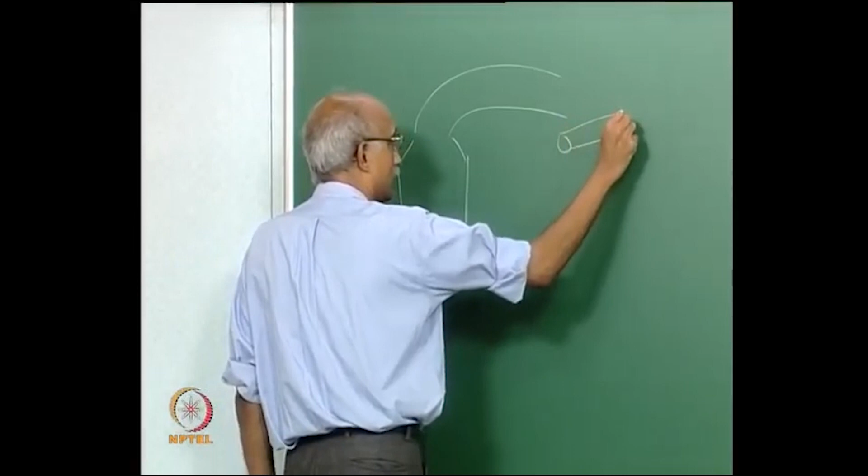The particular illustrative example we were looking at in the last lecture, which we will now go back to, is the case of pulverized coal combustion in power plants. In particular we were looking at the heat transfer associated with the flow of the hot gas which encounters a tube that is held transverse to the flow of the combustion gases.

Again the point here is omega p and dp, that is particle mass fraction and particle size, can vary quite a bit in terms of how they are present in the gases. The primary particle that's present, if you are burning coal, is primarily ash particles, which is the incombustible inorganic fraction of the coal matrix.

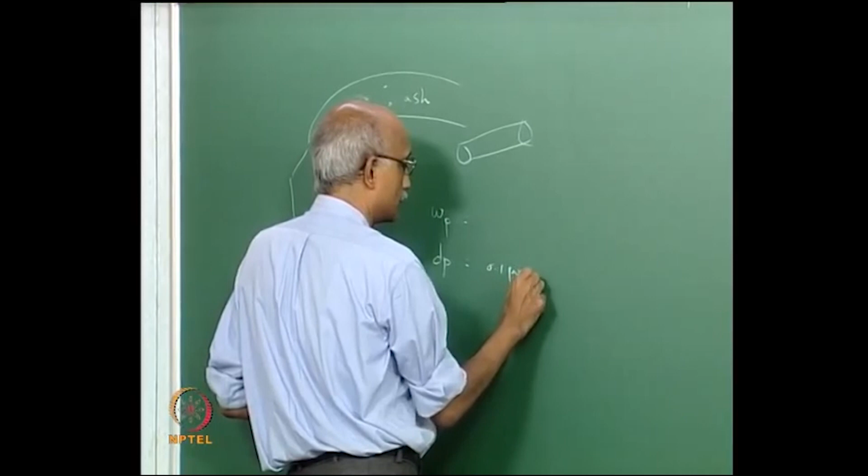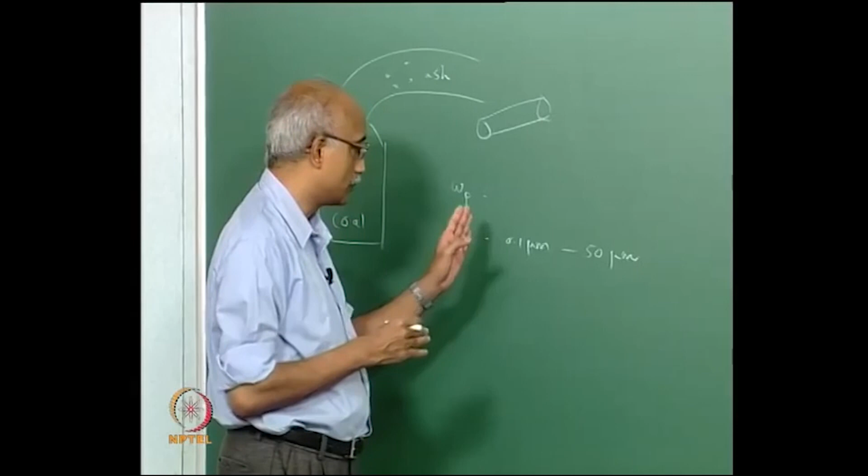And if you look at the typical size distribution of ash particles, it can range anywhere from submicron to 50 microns. So clearly this is a very broad distribution within which on one end of the spectrum diffusional effects and phoretic effects are going to be important, and on the other end of the spectrum inertial effects are going to be equally important.

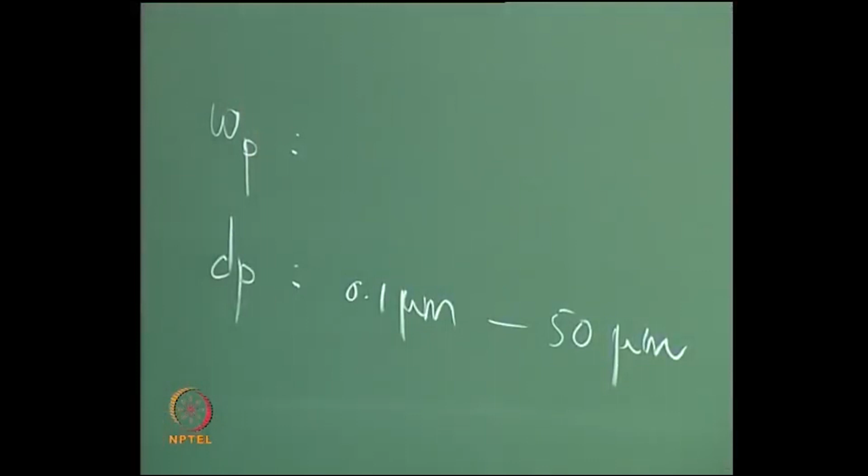The mass fractions are likely to scale inversely with size. For example, the 0.1 micron sized particles are likely to be present in much larger quantities compared to the 50 micron size particles. So, in terms of the mass fraction, this may be of the order of 10 to the power minus 4, and this may be of the order of 10 to the power minus 6, just roughly.

The relative effects of particles in different size ranges very much depends on the inventory of particles that are available in those size ranges, which is a function of particle size. Now, the other parameter that is also important is the diffusivity of the particle, which scales inversely with size. So, fine particles are going to have much greater Brownian diffusivities compared to larger particles.

So, if you look at the Schmidt number, which is equal to nu by dp, nu is of course the kinematic viscosity, which is equal to dynamic viscosity divided by rho. So, if you look at the ratio of nu over dp, what is going to happen? Schmidt number for fine particles is going to be much smaller because diffusivity is in the denominator.

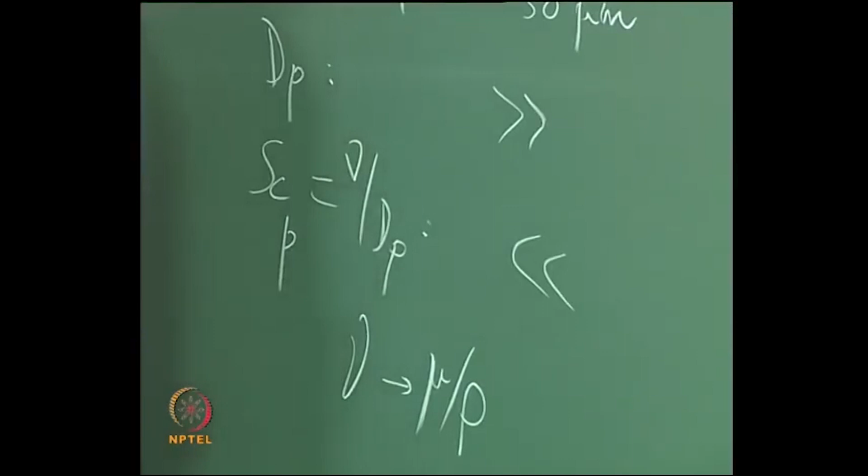The kinematic viscosity is a gas characteristic, so that remains constant. However, fine particles have much larger diffusivities, and therefore the Schmidt numbers are significantly smaller for the submicron fraction. In fact, the Schmidt number can vary all the way from 10 to the power 4 to 10 to the power 8 for various particle sizes encountered in a typical combustion process stream.

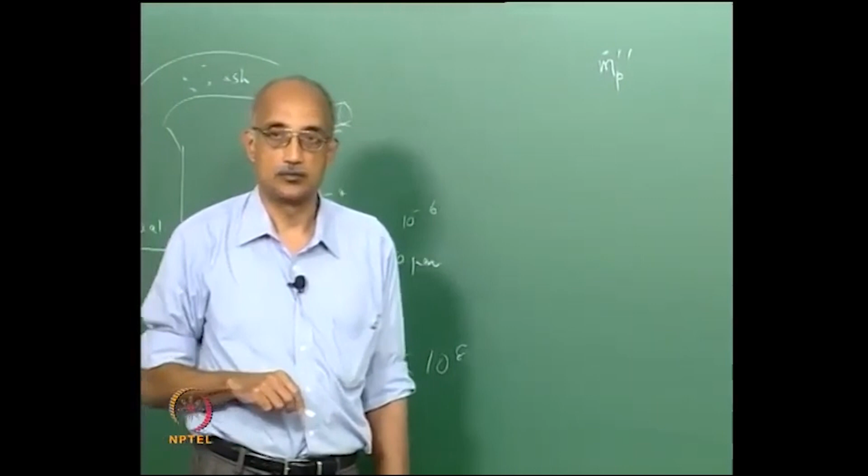So what this means is that if you now estimate the rate at which particles are depositing, and assume that you have a tube of length L and diameter dw, you can take mp dot double prime, which is the particle flux depositing on the wall, as equal to either a Nusselt number of the particles multiplied by the reference particle flux under diffusion control conditions, which is equal to rho times dp times omega p infinity minus omega p w divided by a characteristic length. Or you can write this as Stanton number multiplied by rho times u times omega p infinity minus omega p w.

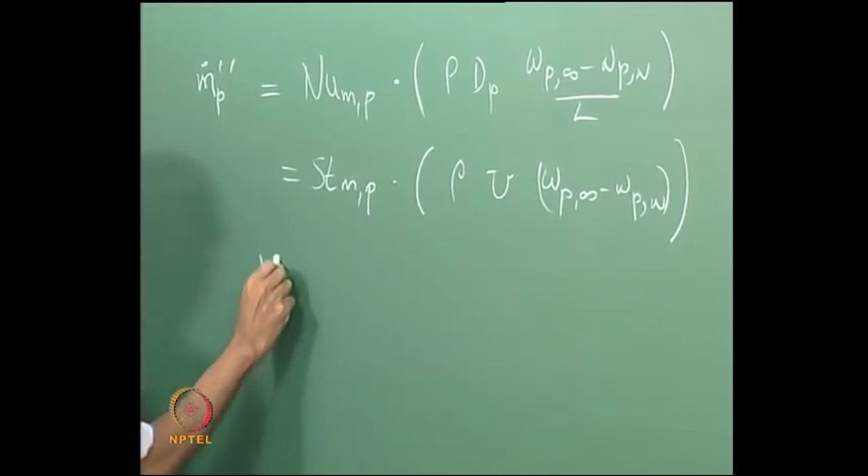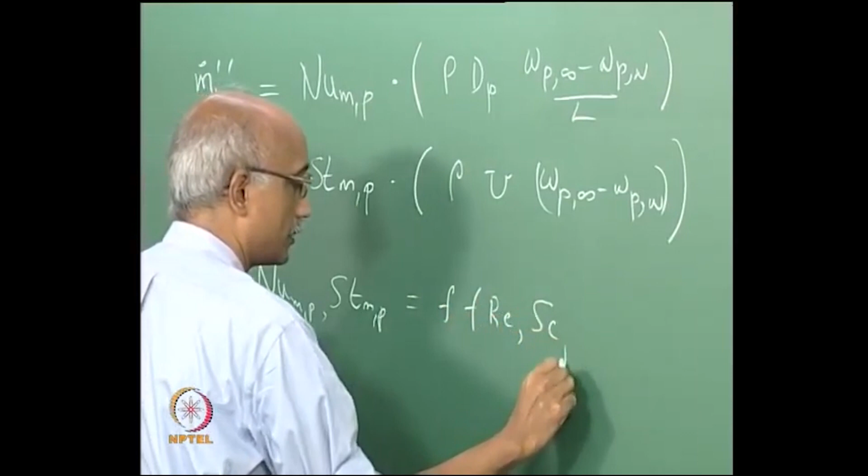So the quantity within the parenthesis is the corresponding reference flux in the diffusion control condition and in the convection control condition. As we have seen before, the Nusselt number as well as the Stanton number are functions of Reynolds number and Schmidt number, just as the heat transfer Nusselt number and heat transfer Stanton number are functions of Reynolds number and Prandtl number. In fact, as I mentioned in the last class, this f and this f are identical.

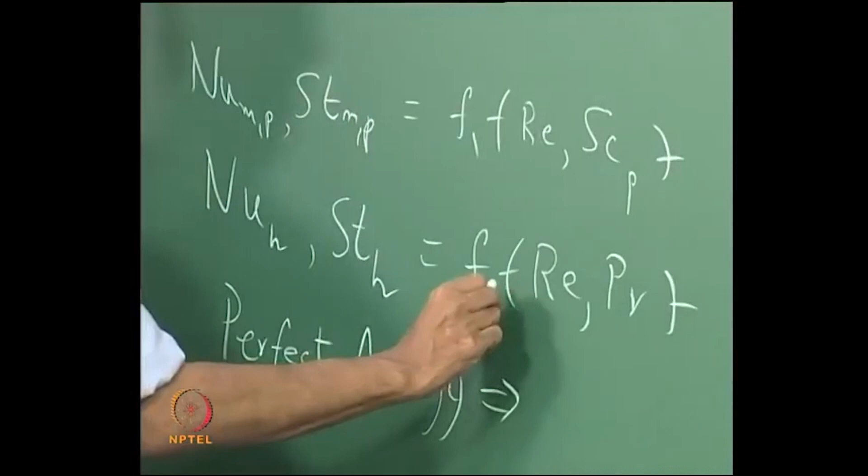So if this is F1 and this is F2, under conditions where there is heat to mass transfer analogy, F1 can be taken to be equal to F2.

So practically what does this mean? We can always estimate these values because it is experimentally easy to measure. We can measure the Reynolds number. Prandtl number for a hot gas is roughly 0.7 or so. So you can establish what the Nusselt number for heat transfer is, and for a typical combustion gas reaching a temperature of 1000 Kelvin at 1 atmosphere, the Nusselt number for heat transfer corresponding to a circular cylinder in cross flow is roughly 36.

What does that mean for the Nusselt number for mass transfer then? Is it going to be higher or smaller? Remember that the way you estimate the Nusselt number for mass transfer, if you know the Nusselt number for heat transfer, is to multiply it by the Schmidt number and divide by the Prandtl number, and the function should be the same.

So let us say that the Nusselt number for heat transfer goes as Prandtl number to the power 1/3, which again is true for most hot combustion products. Then the Nusselt number for mass transfer will be the Nusselt number for heat transfer times the Schmidt number for the particle divided by the Prandtl number to the power 1/3. But as we have seen earlier, because diffusivities have small values, the Schmidt numbers are actually quite large. So the Nusselt number for mass transfer is going to be roughly 10 to the power 3 to 10 to the power 4 times the Nusselt number for heat transfer.

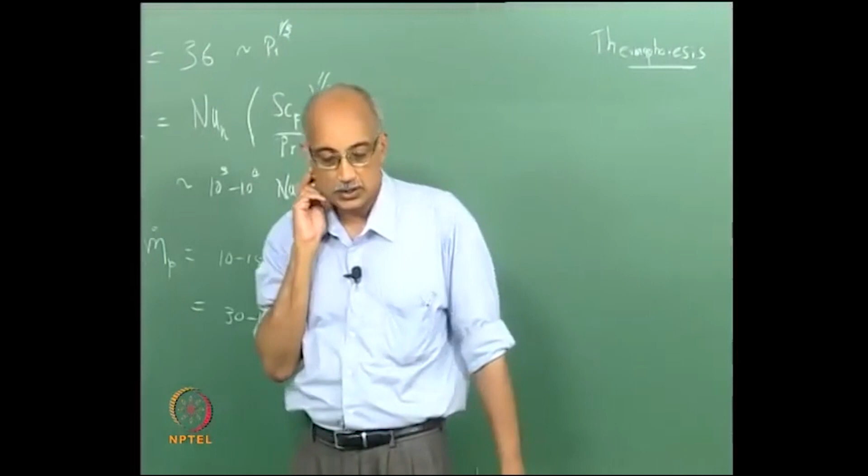As mentioned in the earlier lecture, thermophoresis is the velocity induced on a particle due to the presence of a temperature gradient. A temperature gradient does not only drive heat transfer, it also drives mass transfer, because particles at two different temperatures have different energy levels, and under equilibrium conditions they want to equilibrate their energy, so hot particles tend to move towards cold regions. There is always an equal and opposing flow induced, called Stefan flow, but we will not get into that in this course. The diffusion, or more accurately the convective motion of particles down a temperature gradient, is known as thermophoresis.

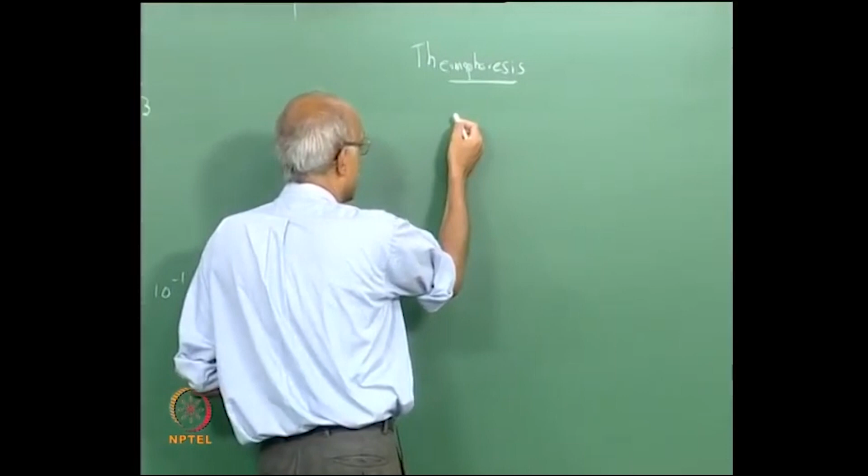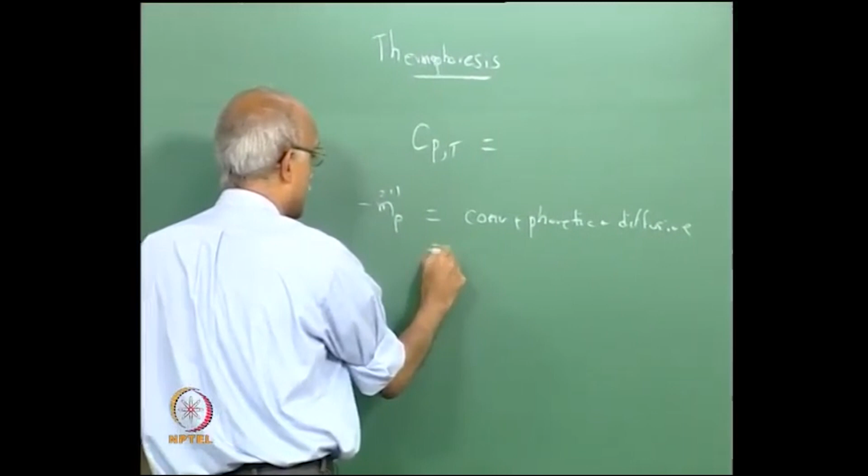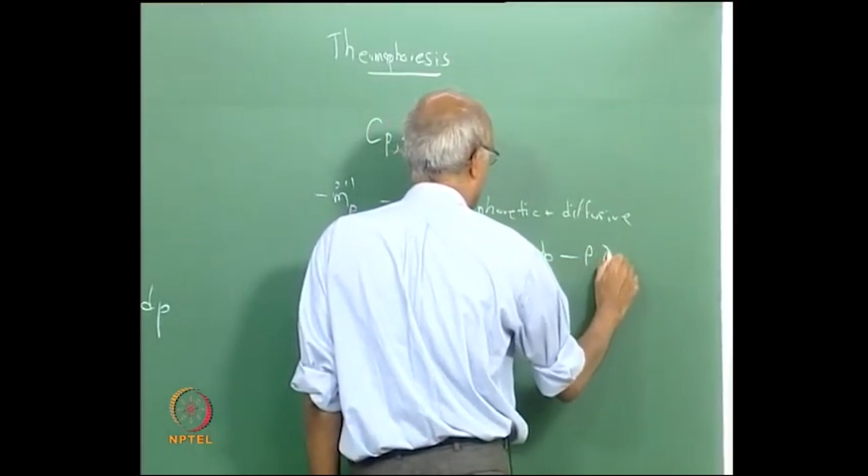The velocity Cpt associated with thermophoresis - recall that the overall flux of particles has three components: minus mp dot double prime equals a convective part plus a phoretic part plus a diffusive part. We had written this as rho times u times omega p, plus rho times Cp times omega p, minus rho times dp times gradient in omega p, in the last class.

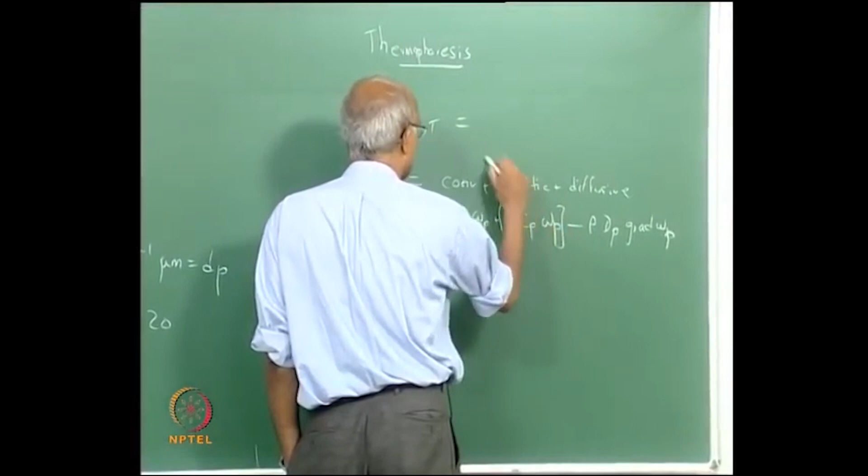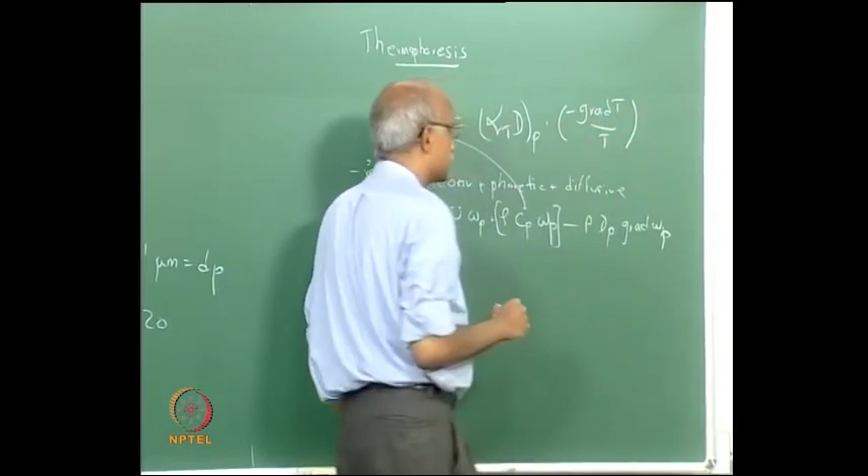So this Cp thermophoresis is essentially the phoretic component, and it can be written as alpha T d for a particle multiplied by minus gradient in temperature divided by temperature, which can also be written as minus gradient in logarithm of the temperature. This parameter, alpha T d p, is called thermophoretic diffusivity.

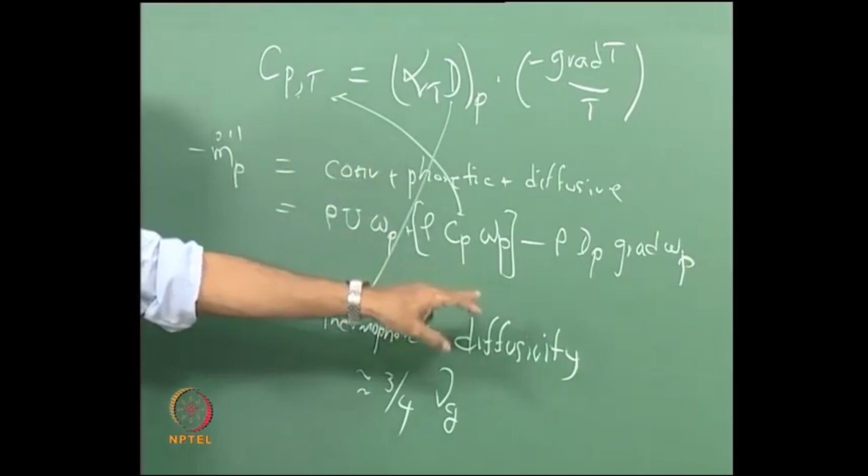Interestingly, no matter what the particle size, this parameter alpha T d p is approximately equal to 3/4 of the kinematic viscosity of the gas. This relationship prevails virtually in every practical environment that has been sampled. So it basically says that if you know the temperature distribution present in your system, and you know the viscosity and density of the fluid in which the particles are suspended, then you can estimate the thermophoretic velocity - the convective velocity induced on the particle by the presence of a temperature gradient.

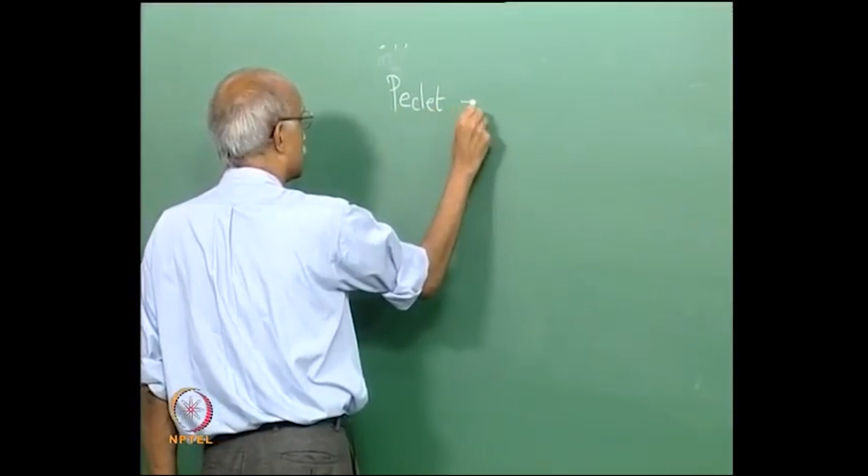So let us say that you have estimated Cpt, what do you do with that? The next thing you do is estimate a Peclet number. The Peclet number in this case is written as minus Cpt times dW over Dp, times the Nusselt number for mass transfer under 0 conditions. Remember, we discussed the 0 condition yesterday - this is the Nusselt number you have just estimated here, NUMP 0.

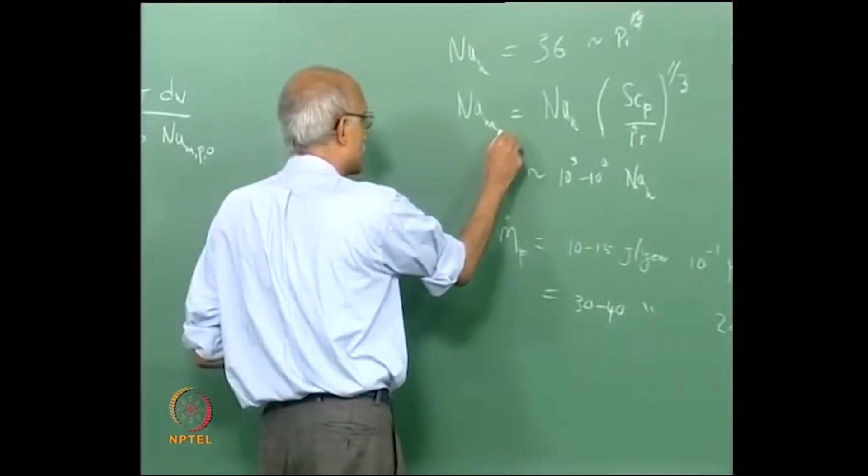Again, remember what we discussed in the last class, that the 0 condition here implies that we have been assuming perfect analogy between heat and mass transfer. So this is your baseline Nusselt number that would have prevailed if there were no analogy breaking conditions. That is now included in this Peclet number in the denominator.

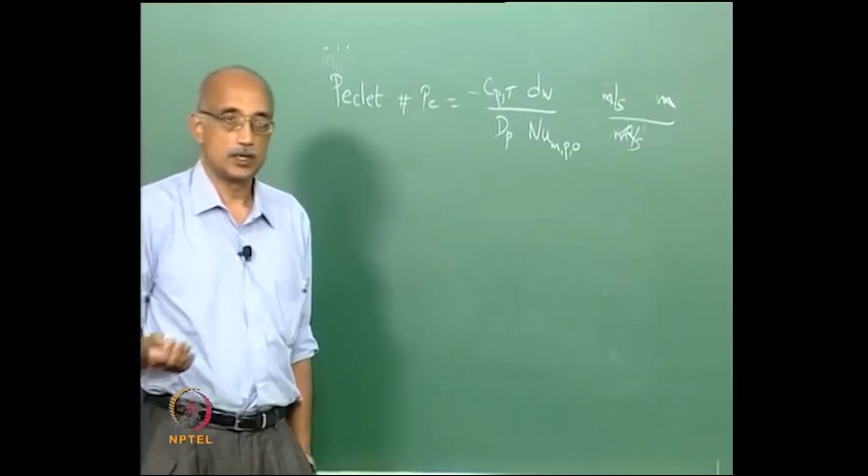Just check the dimensionality: Cpt is velocity, times dW is meters, divided by meters squared per second. So this is a non-dimensional parameter which is referred to as the Peclet number. This is the formulation of the Peclet number for a diffusion dominated case.

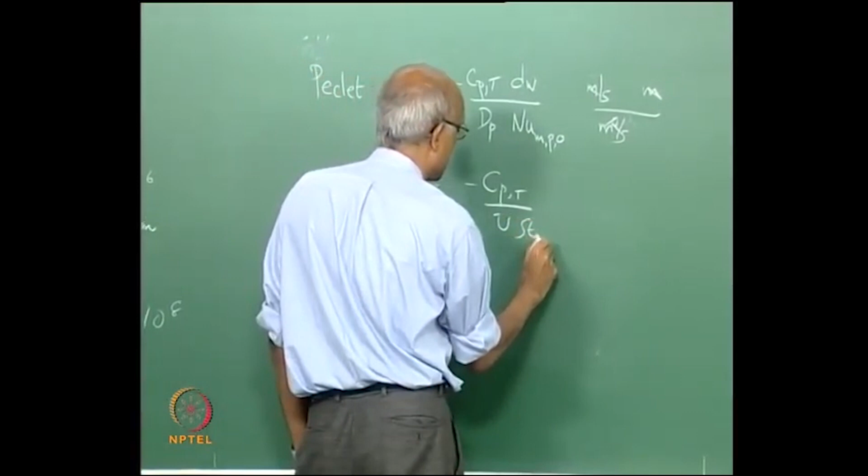In the case where it is convection dominated, you write it as minus Cpt over the prevailing convective velocity u, multiplied by the Stanton number for mass transfer, again evaluated under perfect analogy conditions, assuming that thermophoresis and inertia are not playing a crucial role. So you estimate the Peclet numbers because you know everything else.

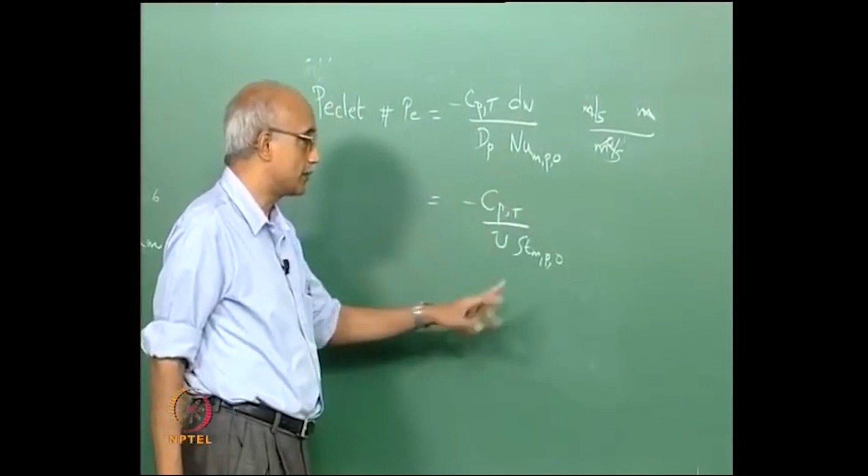You know the thermophoretic velocity from that expression, you know the diameter of your tube, you know the diffusivity of the particle, and you know the velocity of the gas stream, and you know either the Nusselt number or the Stanton number under perfect analogy conditions, because you can estimate them if you know their heat transfer counterparts. So the Peclet number can be estimated.

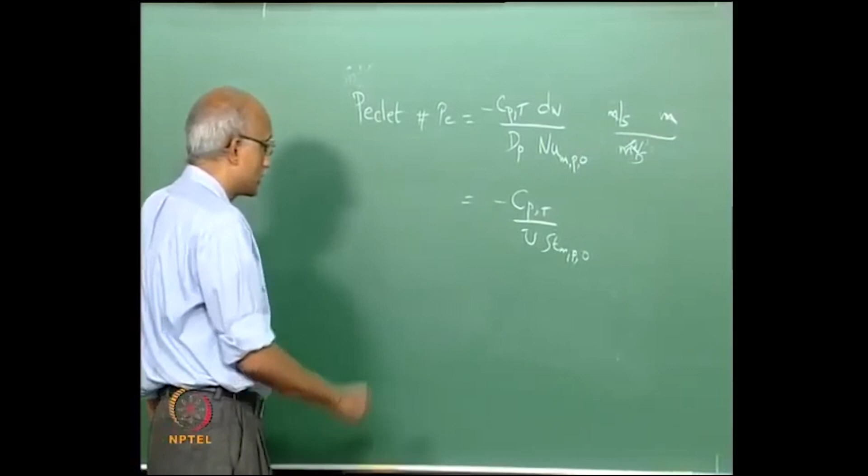Then you develop something called a correction factor, which is based upon the Peclet number. It is equal to the Peclet number divided by 1 minus exponential of minus Peclet number, and then finally you apply this correction factor to the baseline values that you had previously estimated.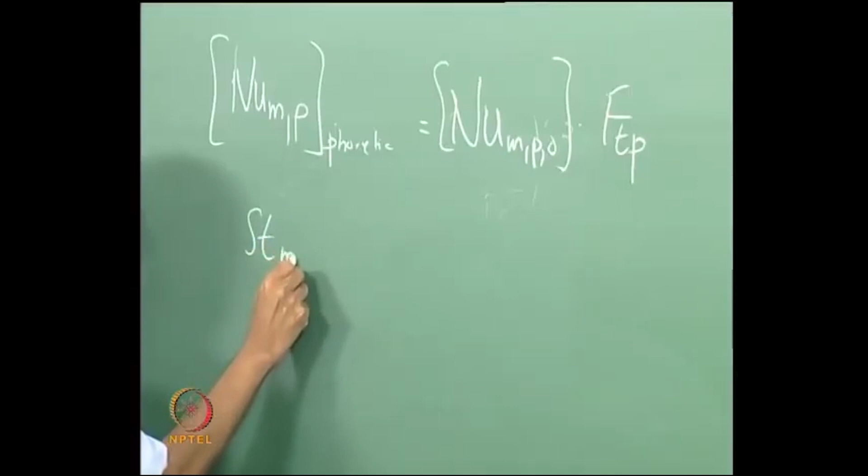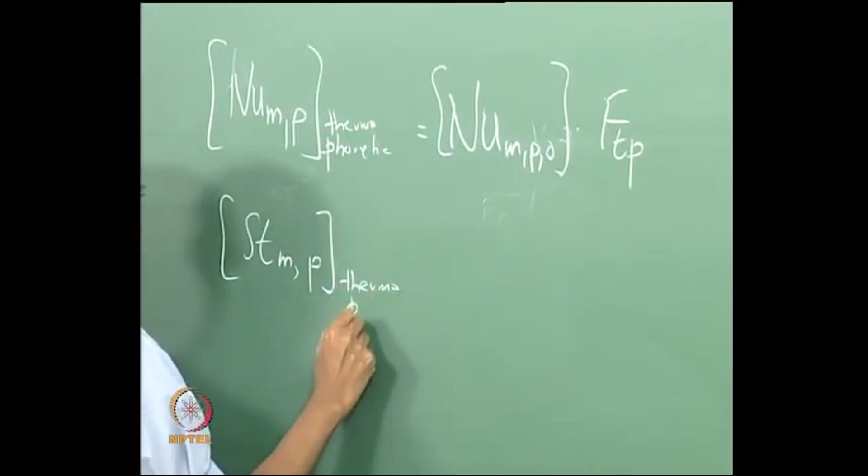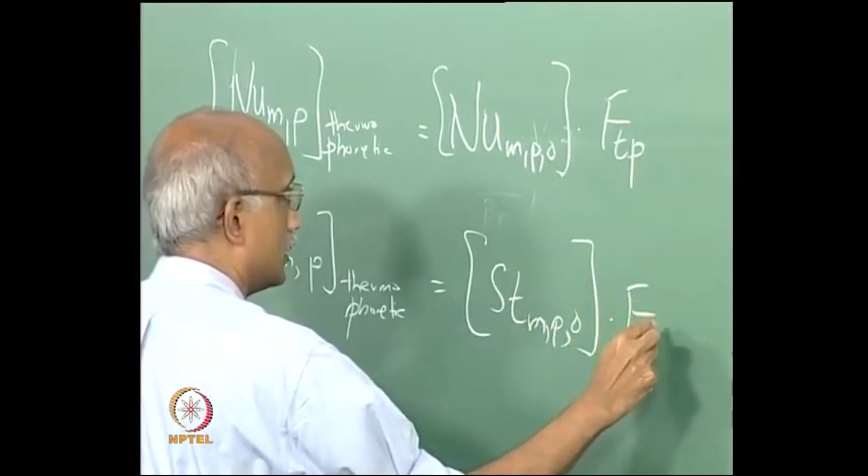So NUMP under phoretic conditions is equal to the NUMP 0 that you had previously evaluated, times this F - let us call this the F correction factor for thermophoresis, FTP. Similarly, the Stanton number for mass transfer for a particle under thermophoretic conditions will be equal to the Stanton number for mass transfer for a particle under baseline conditions, times a correction factor FTP. Of course, these correction factors will be different since these two equations are not identical.

So let us say this is some f prime due to thermophoresis. It is a step by step procedure you have to follow. You first evaluate the Stanton number or the Nusselt number assuming perfect analogy with heat transfer, and then examine the actual flow conditions to see if that is a good assumption, or if there are phenomena that violate it. In this combustion problem, thermophoresis can violate this analogy.

So we estimated the corresponding phoretic velocity. From the phoretic velocity you estimate the Peclet number, from the Peclet number you estimate the correction factor, you apply the correction factor to the baseline Nusselt or Stanton number to obtain the actual prevailing Nusselt and Stanton number, and then you multiply these with the reference fluxes to obtain the actual flux that is going on.

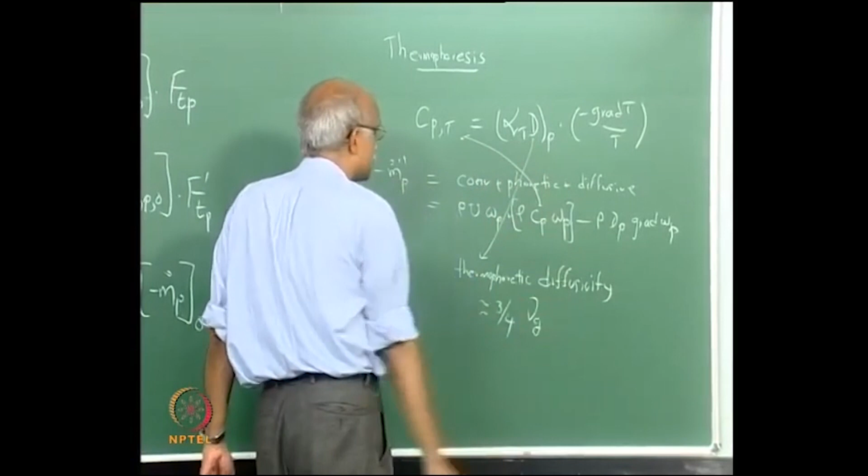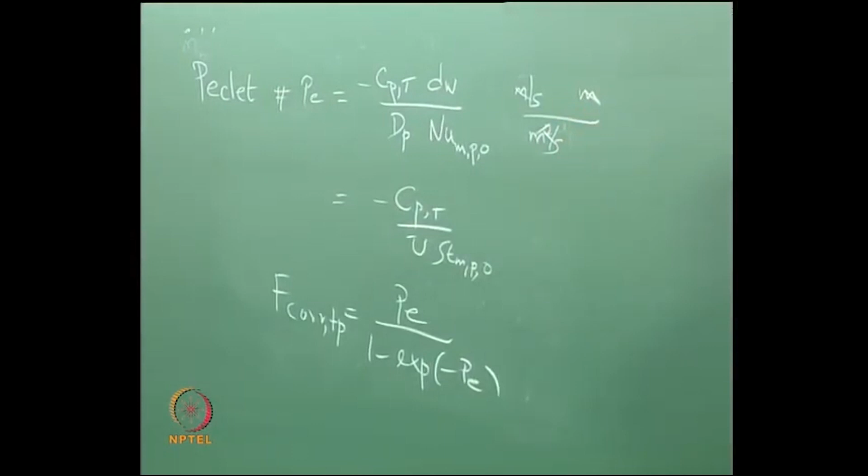In fact, that is basically what this reflects, that a large particle will have CPT values that are much smaller. The reason again is this parameter alpha t times dP has the particle diameter in the numerator, and that effect tends to overwhelm the effect of particle diameter in the denominator of the Peclet number. If you compare this expression and that expression, the dP values to some extent cancel out.

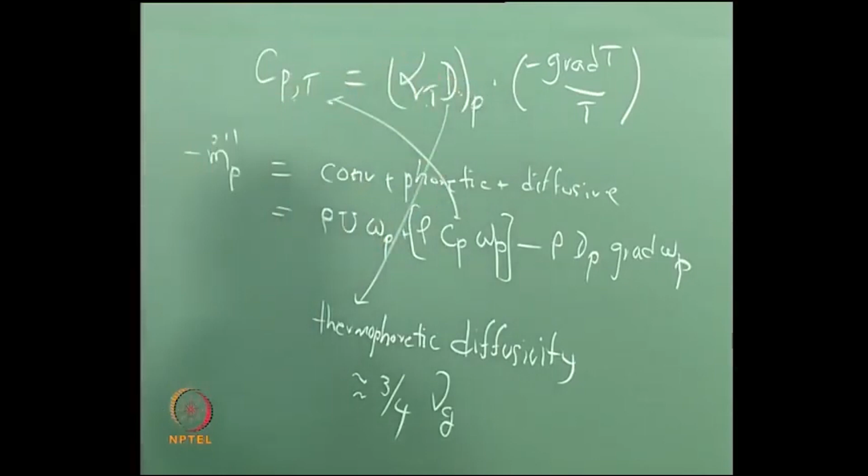However, this alpha t parameter is still there, and it scales with particle size. The alpha t parameter will be larger for finer particles compared to larger particles, and that is why the final correction factor is much greater for finer particles.

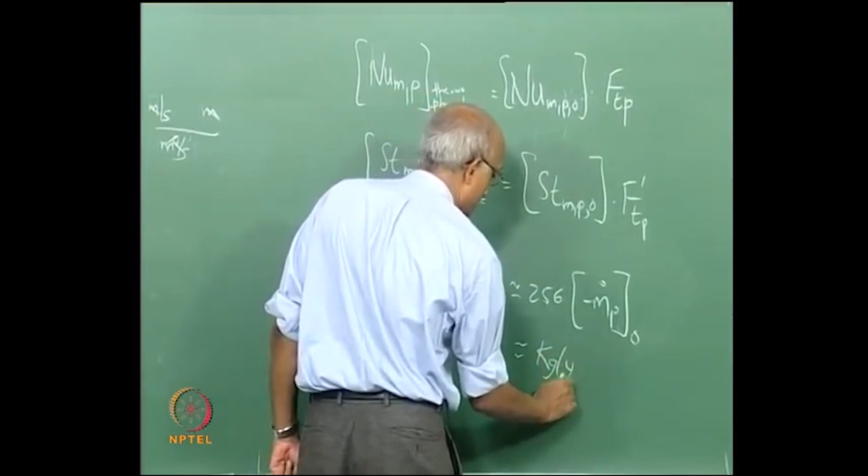So for particles in the submicron size range, thermophoresis is an important correction factor. Essentially now, instead of grams per year, this leads to kilograms per year of ash material depositing on heat exchanger surfaces, which has been practically observed. So we know that thermophoresis is not just a theoretical concept, it really affects the day to day operation of a power plant.

Now let us look at the other case of inertial transport. As we discussed in earlier lectures, inertia is essentially quantified through the Stokes number. The higher the Stokes number, the greater the associated capture efficiency, and the capture efficiency dictates how much of the particle mass fraction flowing on top of a surface actually gets captured on the surface. So that again must be applied as a correction to the baseline values we have previously estimated.

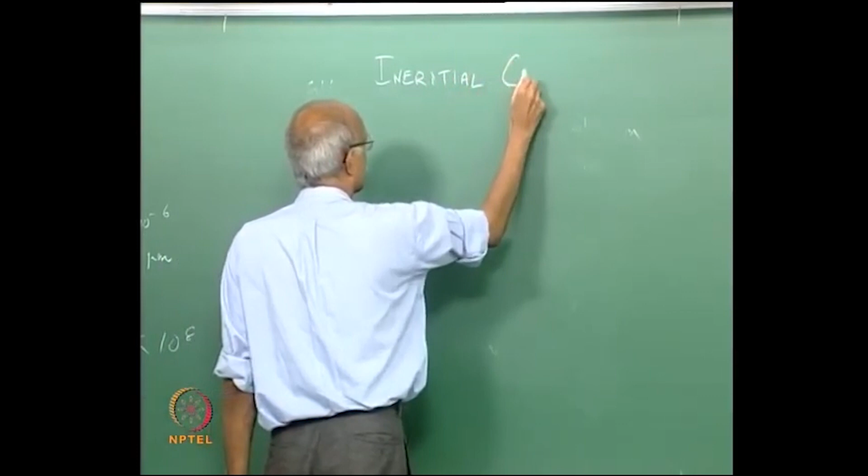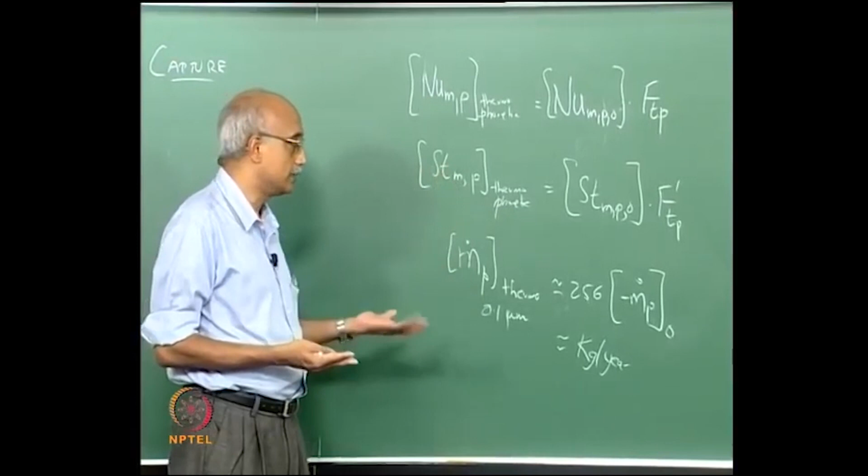However, inertial capture is not represented in terms of a correction factor f the way this mechanism is. By the way, this approach will work for any type of phoretic force. It could be electrophoresis if the applied gradient is due to an electric field, magnetophoresis if there is a magnetic field applied, or even a body force field if that is what is causing a separate velocity to be induced on the particle compared to the motion of the gas. So all of those essentially impart a convective velocity on top of the convective velocity the particle already has, and that is why they can be simply incorporated using correction factors.

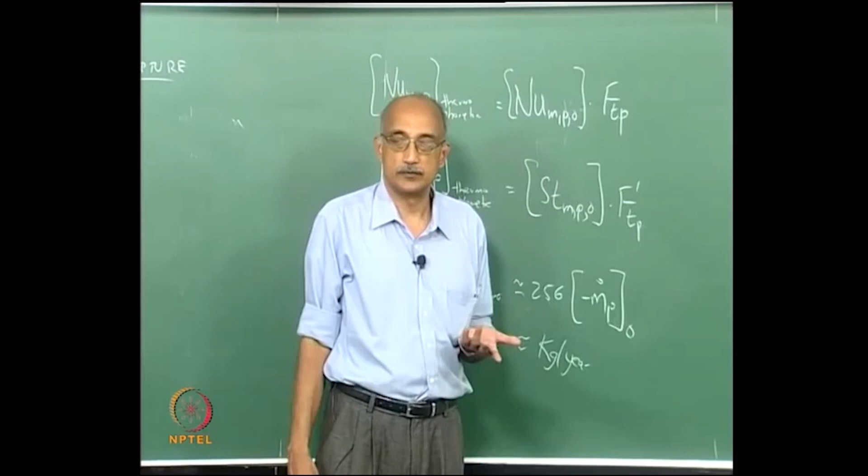However, inertia introduces a totally different mechanism by which particles move. You cannot just take the baseline expression and multiply it by a correction factor, because Nusselt number and Stanton number are not even relevant anymore. When inertia begins to dominate particle transport, forget about Nusselt number, forget about Stanton number—the only dimensionless parameter that is important is the Stokes number. So you have to reconstitute your discussion in terms of the Stokes number.

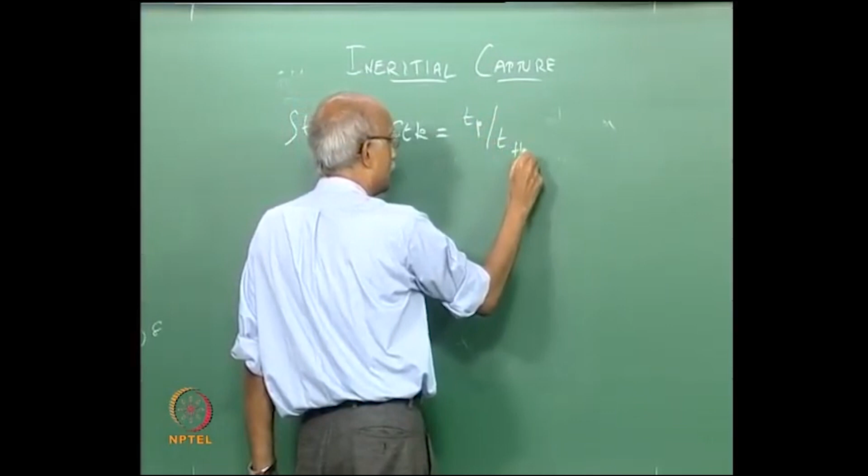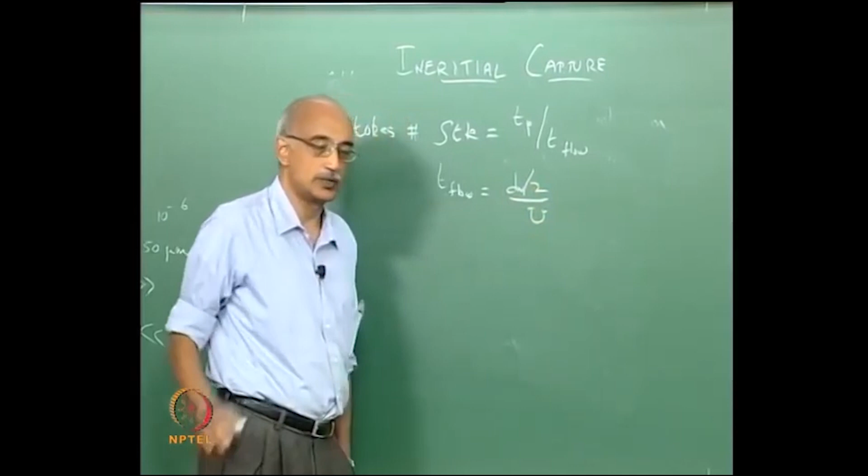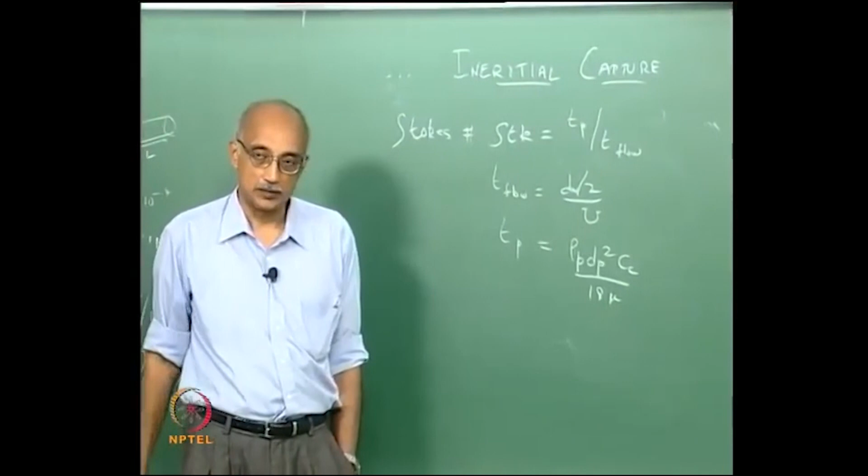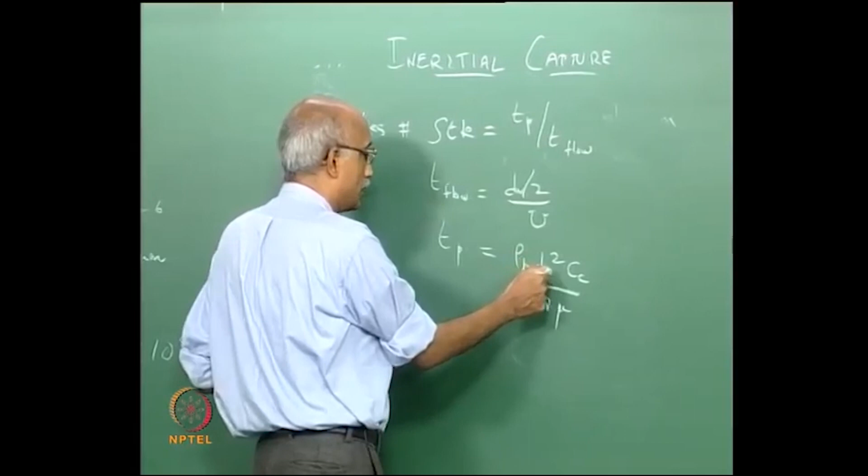Again, the definition of Stokes number - we had actually derived a value for that a couple of lectures ago, but it can be represented as a characteristic time for particle transport to a characteristic time for fluid flow. This T flow you can estimate as dW by 2 divided by U, where U is the approach velocity of the gas stream and dW by 2 is the radius of the cylinder. Tp, if you recall the expression we derived, is rho p times dp squared times Cc over 18 times mu, where mu is the viscosity of the gas. The ratio between these two gives us the Stokes number. So for a prevailing flow situation, once you know all these parameters, you can proceed to calculate the Stokes number.

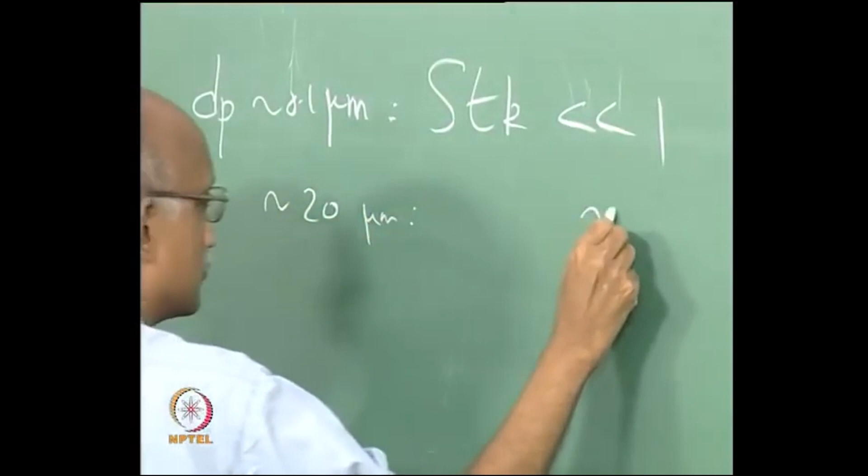Now the Stokes number, if you substitute values for all these parameters and estimate Stokes number for different particle sizes, what you will find is for particles that are of the order of 0.1 microns, submicron, Stokes number is actually well below 1, it is of the order of 0.0 something, whereas for particles that are of the order of 20 microns, Stokes number is approximately 0.4 to 0.5.

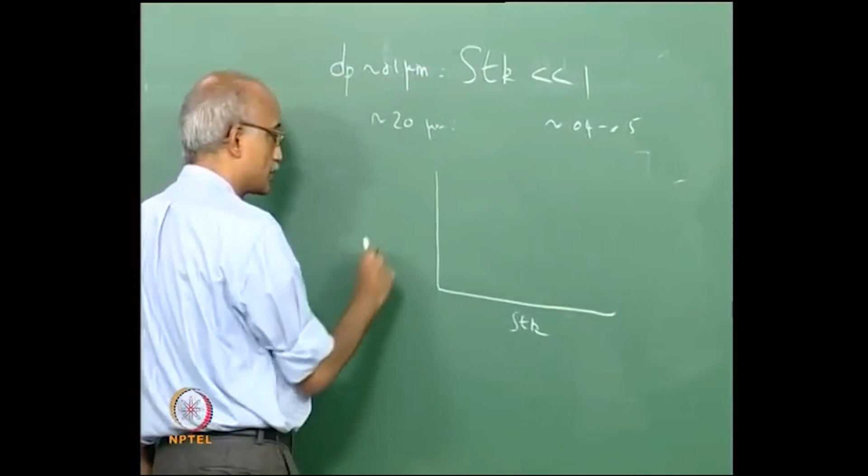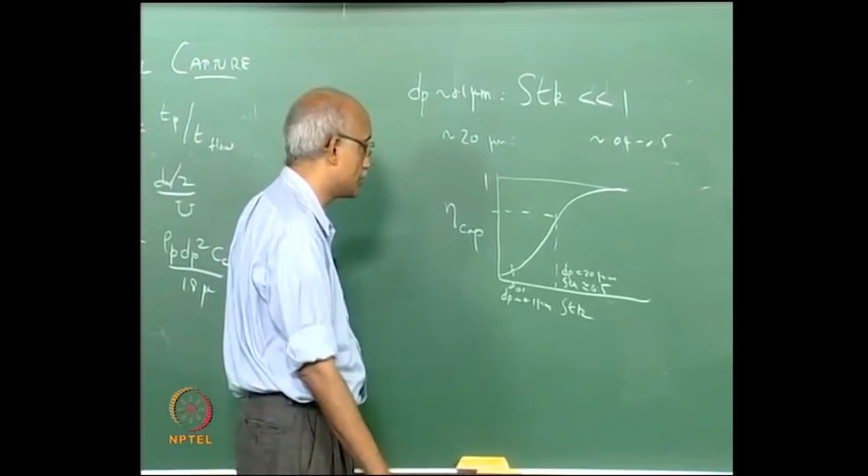So what is the practical implication of that? If you recall the graph we sketched in the last lecture, if you plot Stokes number versus capture efficiency, you have an S-shaped curve. So for a particle diameter of 0.1 microns, your Stokes number is going to be roughly 0.01, and for a particle of size dp equals 20 microns, Stokes number is going to be approximately 0.5. The capture efficiency rapidly rises from being close to 0 for the submicron particles to approaching 1 for very, very large particles. So depending on the actual shape of this curve, your capture efficiency is now going to have a finite value somewhere between 0.4 to 1.

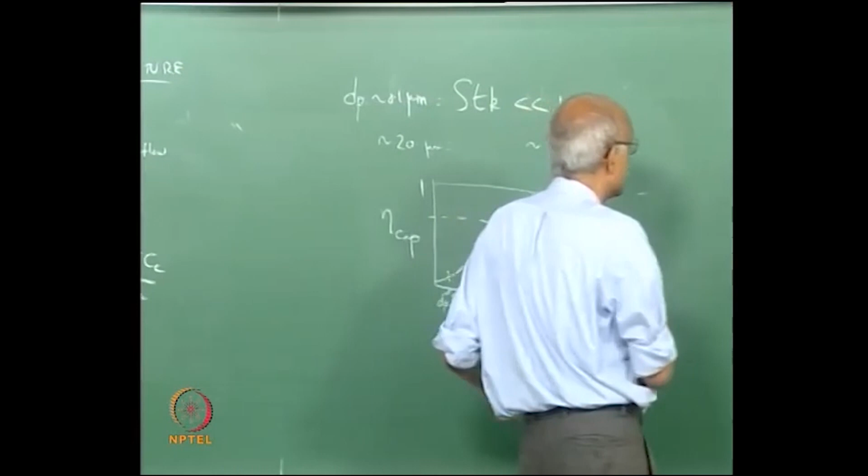So under conditions where inertia is dominating, the expression for particle capture, mp dot, is equal to the capture efficiency eta cap times mp dot flowing. That is, it's a product of the rate at which particles are flowing over a surface and the capture efficiency, or the capture probability. So this is basically eta cap times rho times u times omega p infinity times the area - that is the projected area of the surface exposed to the flow of gases. So this is the expression you now use to calculate the rate of deposition of particles onto the surface.

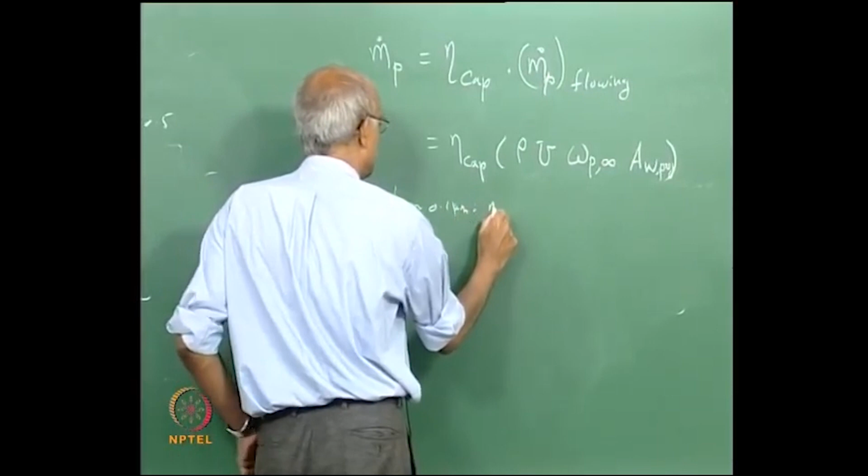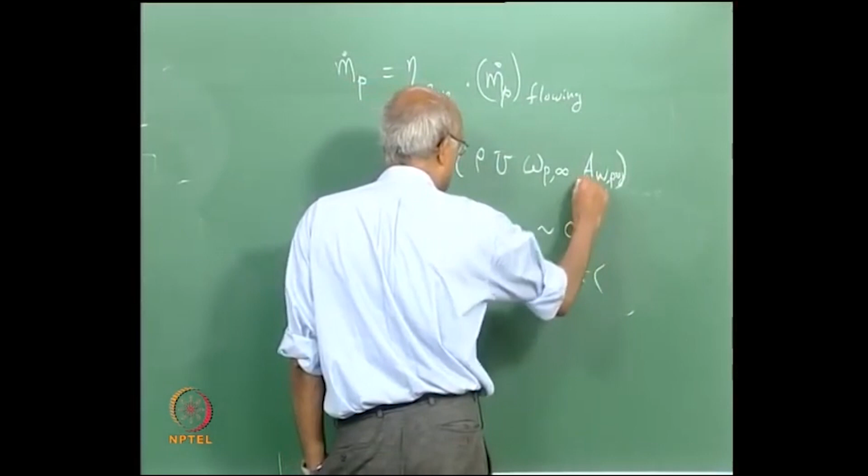And again, the key difference is for particles that are 0.1 microns, mp dot due to inertial effects is going to be virtually 0. The reason is the capture efficiency is very low. So no matter what the mass fraction or mass flux of particles flowing over the surface is, as long as the capture efficiency is very low, it does not matter, it will be asymptotically approaching 0. Whereas for particles that are of the order of 20 microns, the same capture efficiency value, whether it's 0.5 times this number inside the parenthesis...

And again, if you do the calculation for a realistic set of power plant conditions, we finally obtain values that are of the order of tons per year when you include inertial effects into your calculations. So if you recall, we have gone from grams per year of deposition if you assumed perfect analogy between heat and mass transfer, to kilograms per year if you assume thermophoresis is important, to now estimating tons per year if you assume inertial effects are also important.

So what do you do? You actually look at a power plant that is operating and try to get some data on what is the observed rate of deposition. And what you find is this is actually what is happening in power plants today, and that is the reason why power plant losses due to fouling are such a huge problem in the industry. There are literally millions of dollars of loss daily on a global scale due to the fouling problem, because of the shutdowns required, the cleaning required, the reduction in heat transfer efficiency, the reduction in momentum transfer efficiency - all of that is associated with the growth of these fouling deposits, which is directly related to this phenomenon. So this should give us some clues about how to extend the lifetime of boiler tubes.

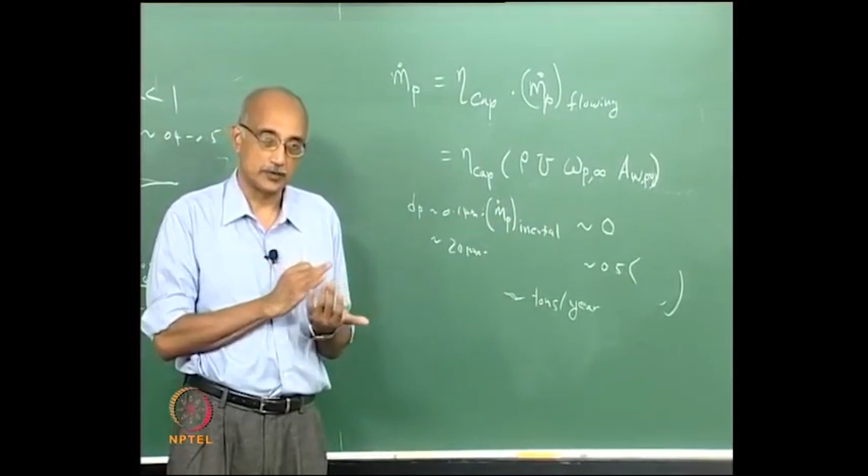Things like velocity you cannot play with too much, because you need high velocities for high heat transfer efficiencies. So you do not want to reduce the U value; you want to keep it as high as possible, both for extracting momentum in gas turbines, and you can also operate a gas turbine using coal combustion.

In that case you do not care so much about extracting heat, but rather about extracting momentum onto turbine blades and stator vanes, or in boiler tubes you are extracting heat. For both, a high U value is good because that results in a high Reynolds number, and the higher the Reynolds number, the higher the heat transfer and momentum transfer coefficients.

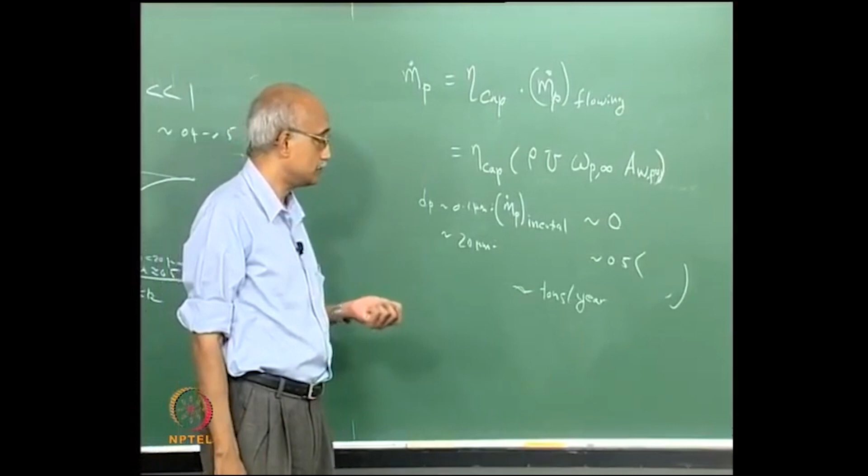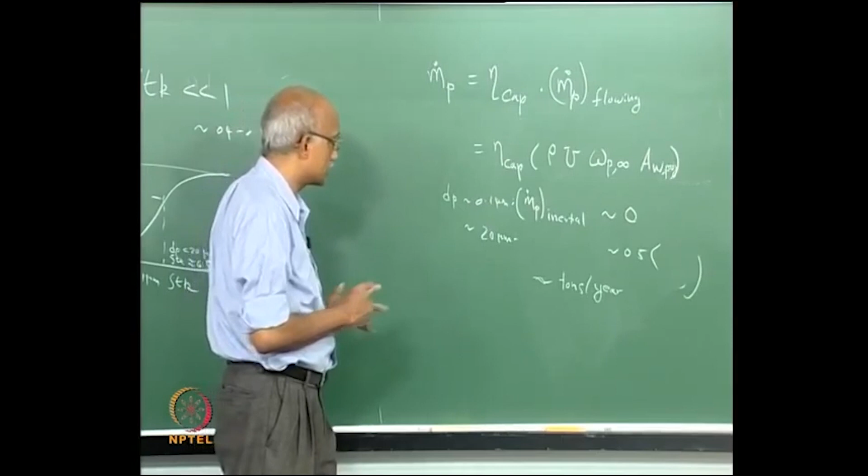But this can still give you ideas on how to minimize the growth of fouling layers on heat transfer surfaces in power plants. One of the key parameters here is eta cap. The view we've shown is that capture efficiency only depends on particle Stokes number. Is that true? Does that always work, or is that too simplistic a viewpoint?

Because there are really two parties here: the particle is moving, but there is also the surface, and the surface also has to allow sticking of the particle. So this statement or graph makes certain assumptions.

It assumes that the surface energy of the boiler tube is very, very high - virtually infinity. In other words, it assumes that if a particle can stick on the surface, it will stick. There is nothing about the surface itself that will reduce the probability of particles sticking.

But recall our discussions regarding adhesion and cohesion of particles. Clearly that is not true, right? The properties of the material have a huge influence on forces of adhesion.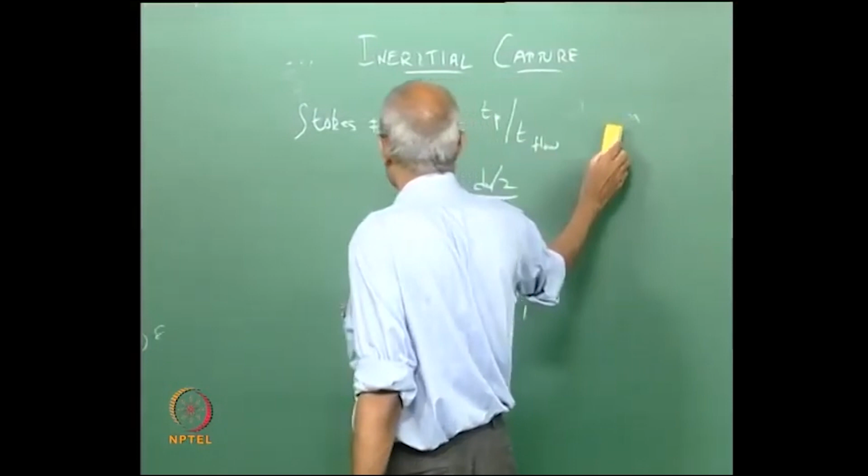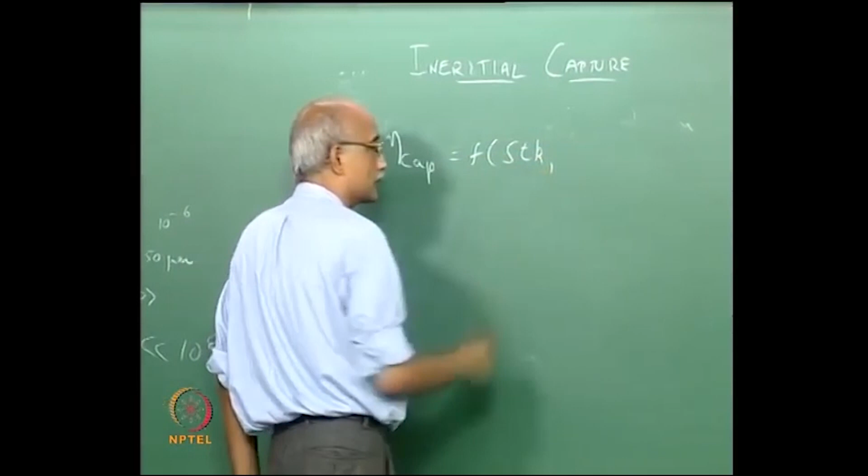So a more realistic representation of the capture efficiency would be that eta cap is certainly a function of the Stokes number, but it should also be a function of the surface energy of the surface on which the particles are depositing.

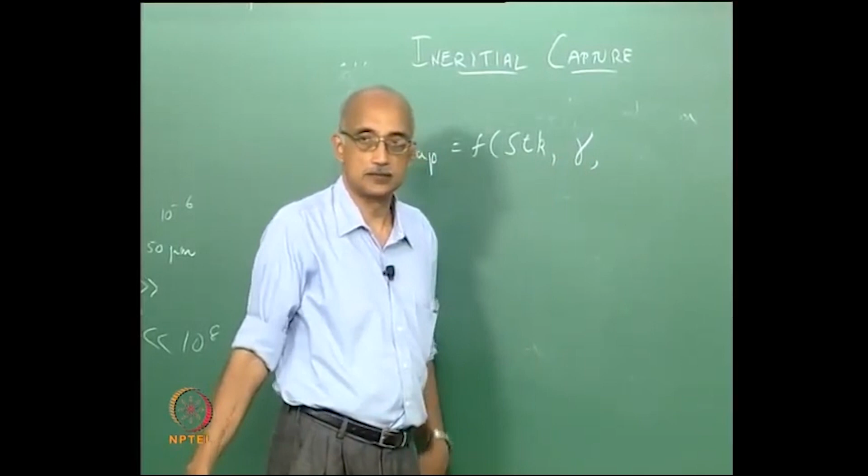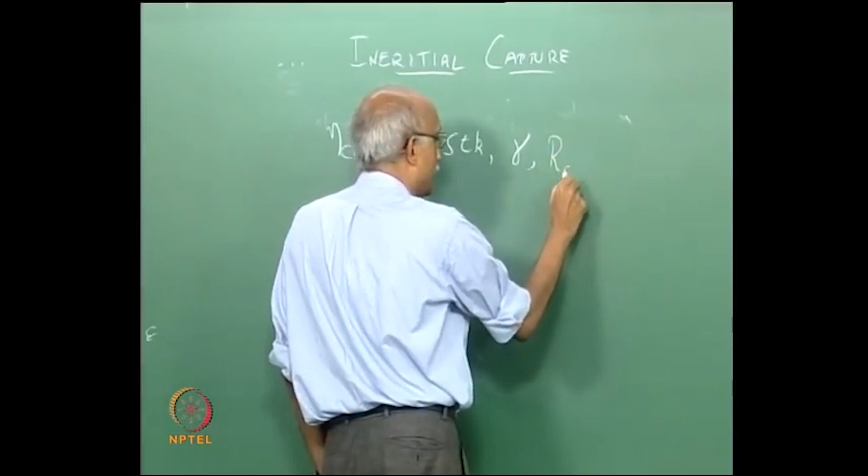Anything else? It should also depend on roughness, because as we discussed in the module on adhesion, particles stick to a rough surface very differently than to a smooth surface. So something like a surface asperity, the RA value, will also play a significant role.

When you think about it, there are many more parameters that play into this. Even things like the hardness of the particle should play a role - a harder particle should be able to rebound more easily than a softer particle because it can deform. Remember the discussion about a deformable versus a non-deformable surface.

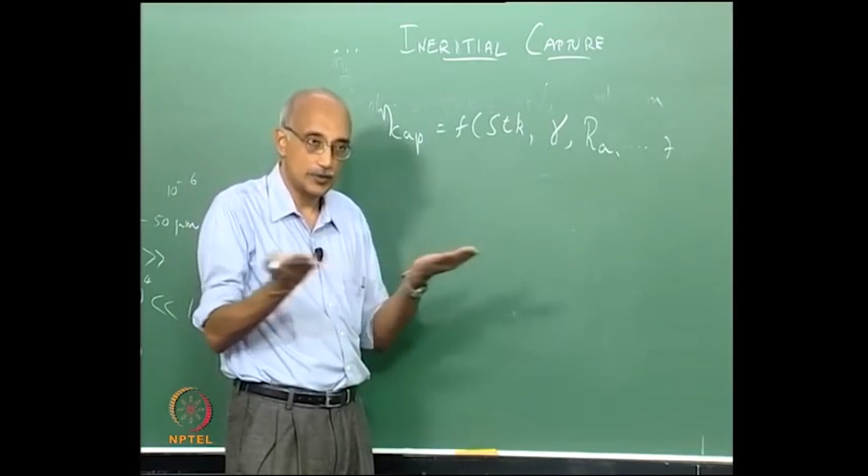If you have two deformable surfaces coming into contact, the adhesion force between them is likely to be greater because the effective interfacial area will be larger, and it will keep increasing with time as the two surfaces accommodate each other. So all of those factors can come into this also.

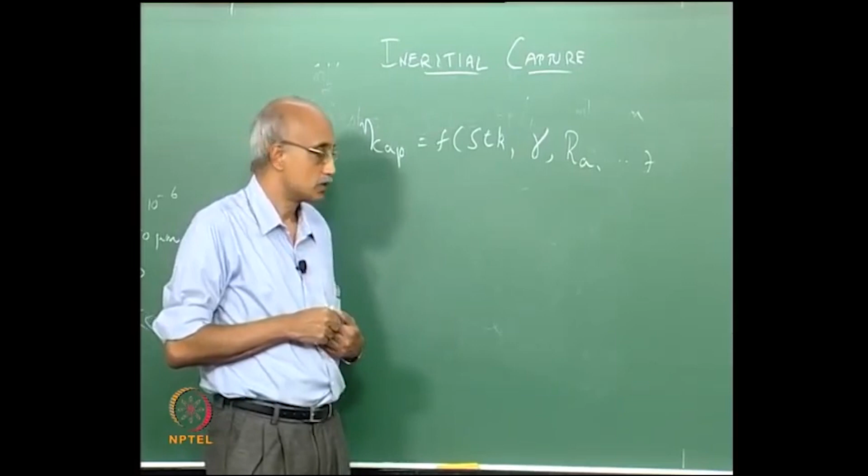So this representation, that capture efficiency is only a function of Stokes number, is an oversimplification to highlight that particle transport plays a significant role. But a material scientist or metallurgist would argue that these aspects are just as important, if not more, and I would agree.

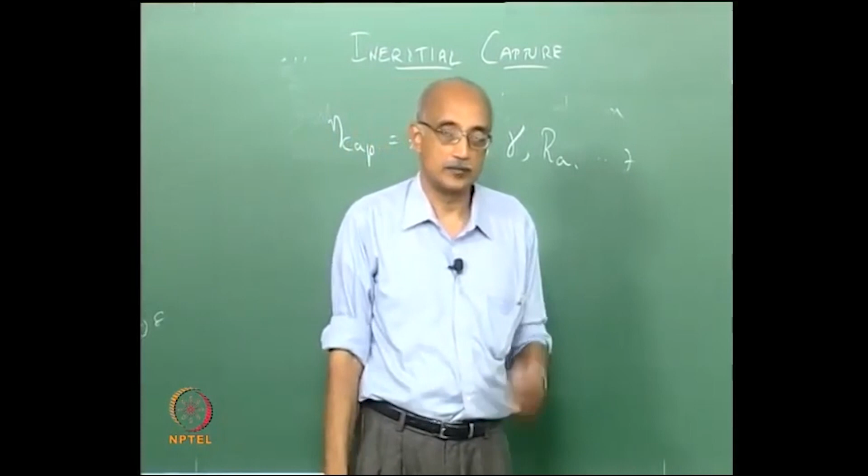Tremendous effect. You could argue that from a fouling viewpoint, this is really the first order effect because it has such a dramatic effect. No matter how much flux there is, as long as you can maintain a low energy surface, it will repel whatever particles come near, so it doesn't care. But that's from a fouling viewpoint.

Again, remember there are multiple mechanisms by which particles can degrade surfaces. Fouling is one, but there is also something called erosion. Erosion does not care about surface energy. In erosion, particles strike the surface at high velocity and cause physical damage to the substrate. It does not matter if it is a low energy or a high energy substrate. Surface energy only affects fouling, which is an adhesive phenomenon. It requires that particles stick to the surface. So surface energy has a very direct effect on that.

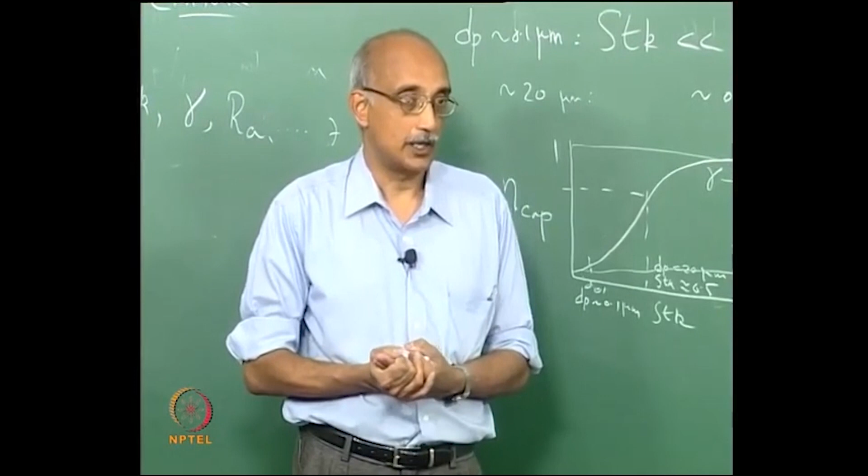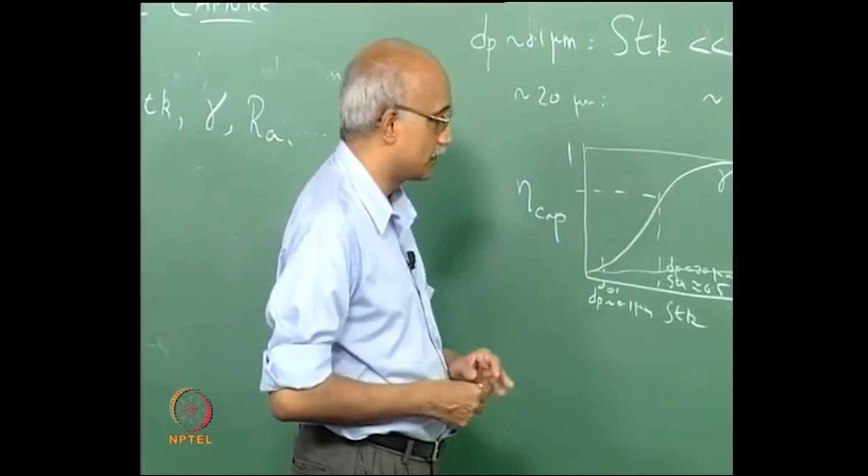Fouling, on the other hand, is actually less on a rough surface because the effective interfacial area of contact is reduced by introducing roughness on the surface. And finally, slagging - the effect of surface roughness on slagging is kind of interesting, it depends on the relative sizes of the particles and the roughness asperities.

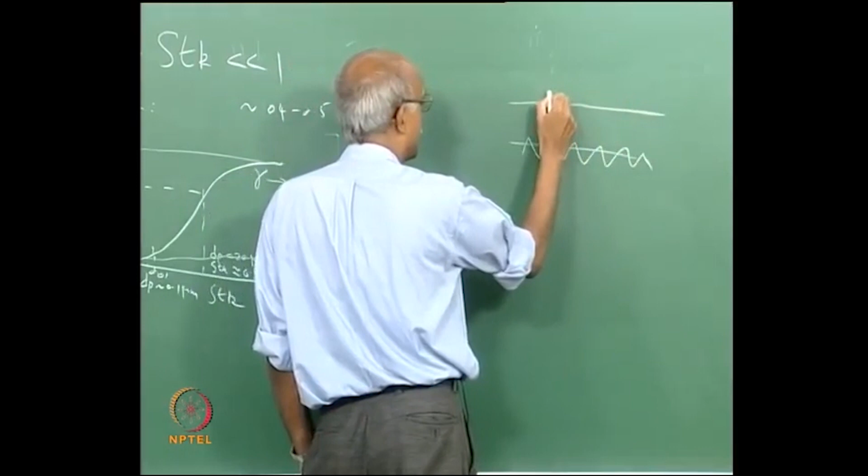So if you have a surface with a certain roughness scale - in slagging, as I mentioned, the droplet has to hit the surface and spread. On a smooth surface, if a droplet hits and it's a wettable surface, it's going to spread out, so the effective area of contact is going to be quite large, and the capture efficiency will be very high.

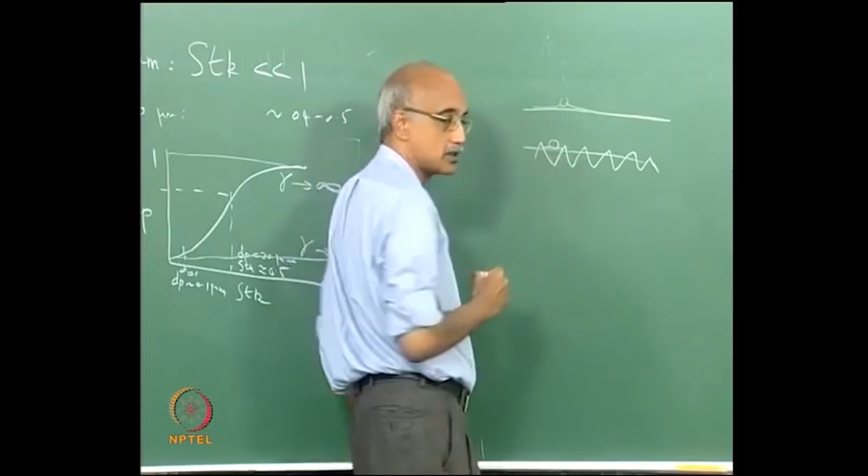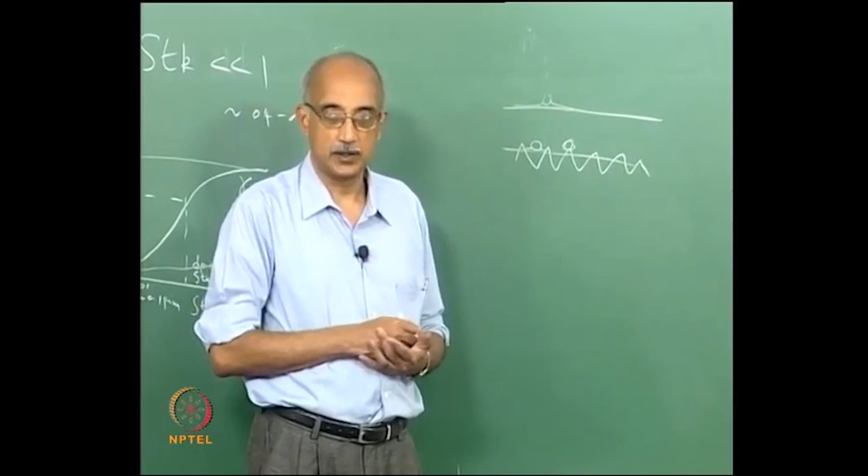On a rough surface, if it hits, it's only going to be able to spread so much. So the capture efficiency is going to be truncated because the droplet cannot spread as far as it wants to. And if the droplet hits near the peak of an asperity, it's essentially going to break up and start forming layers in that direction also.

So in that case, a rough surface may actually promote slagging by making available a greater surface area for the slagging material.

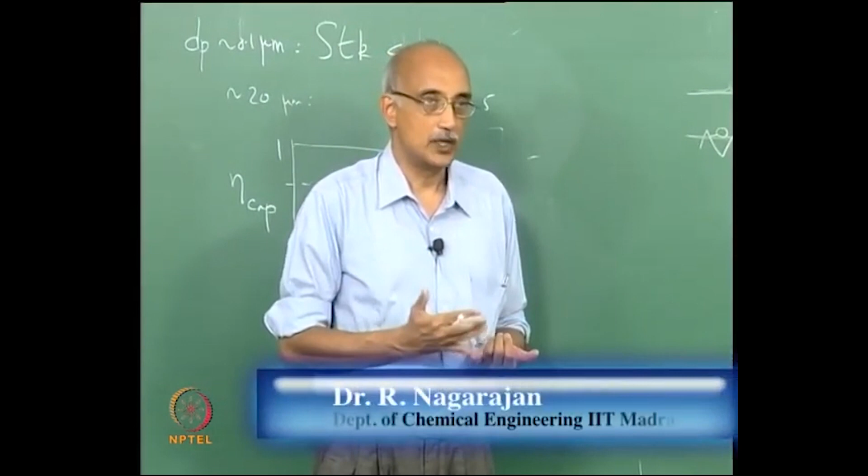These are interesting aspects that can be studied in a lot more detail, but the point I want to leave you with in this lecture is that particle transport and particle deposition are very size dependent, and it's ultimately the size distribution of the particle population that will dictate all of its flow characteristics, including adhesive behavior, cohesive behavior, transport, deposition, and ease of removal from a surface once deposited. These are aspects we need to understand in a fundamental way in order to apply that knowledge in tackling practical situations in industry.

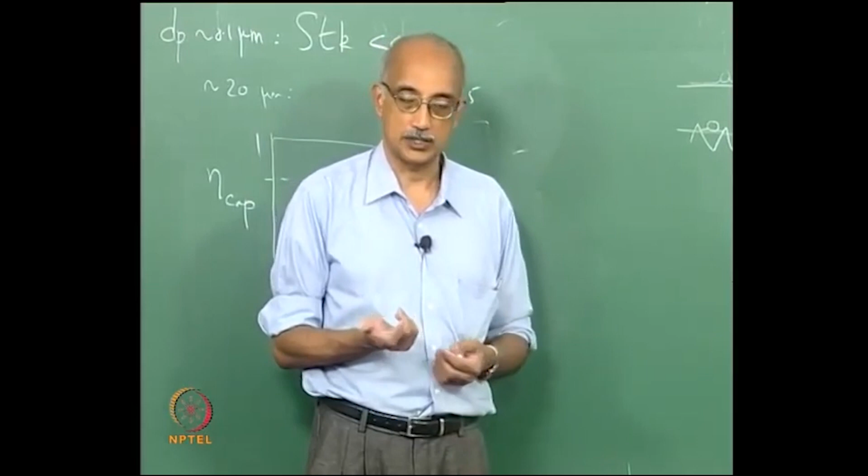Okay, so we will stop our discussion of this module with this lecture. Starting from the next lecture, we will start addressing the next aspect of particle characterization, which is chemical and compositional characterization of particles. Any questions on what we have covered in this module?